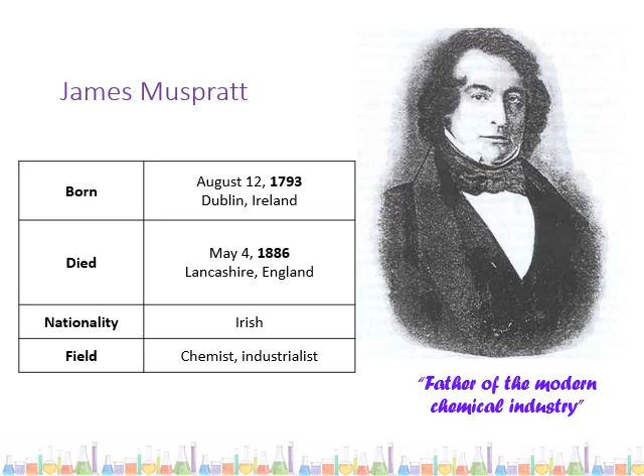James Muspratt is known as the father of the modern chemical industry. Again, you don't need to know anything about him. He's Irish, and I think that's why they mention him in the book. The principles of industrial chemistry. So that's what we're getting into now, and this is basically what the whole chapter is about: understanding how the chemical industry makes money by carrying out chemical processes, basically.

So there's just lots of definitions here. Again, not things that you necessarily need to learn off. Hopefully most of them will make sense, that the word will match up with the definition and it would be common sense. The first one isn't. Batch processing is a way of producing industrial substances. It's where the reactants, which we call feedstock in industry, are allowed to react for a fixed time with each other inside a vessel under controlled conditions, and when the reaction is complete, the product is isolated. So this is basically, you put all the reactants in the beginning and you take your product out at the end.

I'll do feedstock now. Just to point it out, feedstock is the reactant. There's no difference between a reactant and a feedstock. The only thing I would say is don't confuse feedstock with raw material. Raw material is what you use to produce the feedstock. You might have to treat raw material to make it pure to then use it as a reactant. So that's the difference between those two.

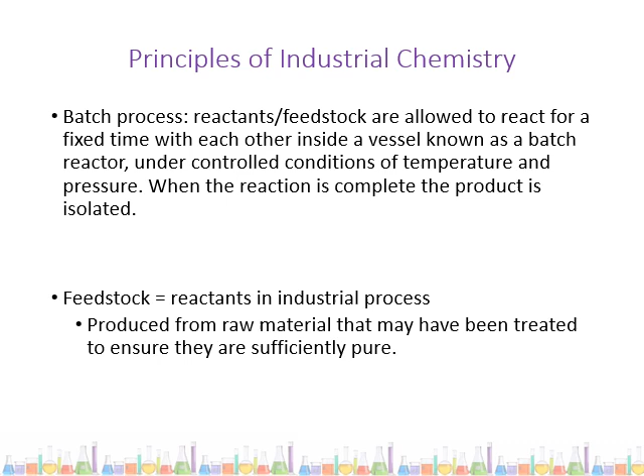So batch process, now we're going to go on to the other types of processes, which are the continuous processes. So batch process, you put your reactant in the beginning, you let the reaction happen, and you take your product out at the end. A continuous process is where you're constantly feeding reactant into the reaction vessel, and at the other end you're constantly taking product out as it's produced. So you're not waiting for all of the reactant to turn into product. You're taking out the bit of product that's made, so you're making space in the reaction vessel so you can feed in new reactant, and so it keeps going continuously the whole time.

Batch is like making a batch of cookies in baking, that you're mixing up your ingredients, putting them in the oven, and you get a batch of cookies out. Continuous is that you're constantly adding more reactant and taking the product out at the same time.

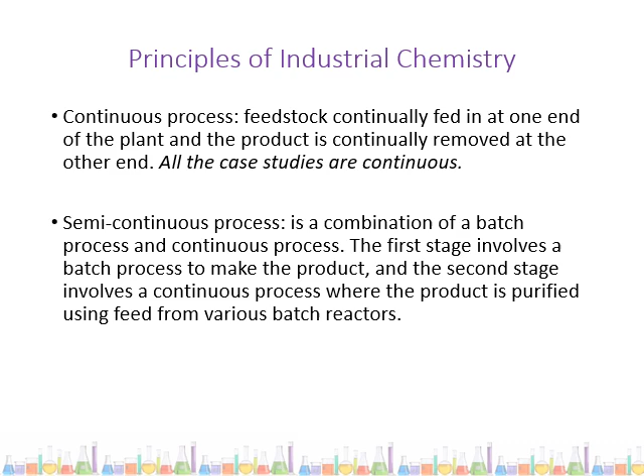A semi-continuous process is a mixture of both of them. Not as important, I haven't seen them ask about this, but it's basically the first stage is a batch process where you make the product, and then the second stage involves the continuous process where the product is purified using the feed from the batch reactor. So you have your batch process in the beginning, and then as you get your product from that, you feed your product in, effectively becoming the new reactant in the next vessel, and you have a continuous process of purification there.

The continuous process then, the advantages and disadvantages of that. So your first advantage is that it has low labor costs because it's all computer automated, but that does mean that you have the disadvantage of having higher capital costs, so higher costs in the beginning to buy all of this computer equipment and to set up the plant to be automated. Second advantage is that there's low risk of contamination because you're only making one product continuously.

But the flip side of that, the disadvantage, is that there's less flexibility as the plant is tailor-made for one specific reaction to occur. The third advantage is that you can have long periods of the machinery being in use without needing to stop for maintenance. But that does mean that it's not as cost effective unless it's run at full capacity all the time. It's very expensive to have it just sitting there not doing what it's supposed to do. So you do need to know the advantages and disadvantages of batch and continuous, and you need to be able to compare them. The one we're going to look at is continuous, so I would say that that one's slightly more important.

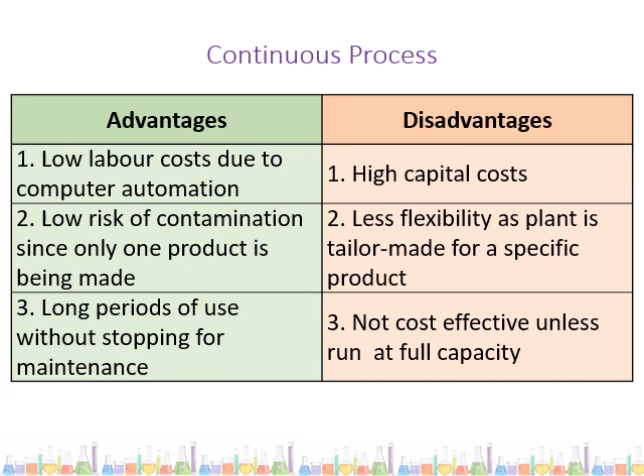Okay, so the characteristics, these are your list of definitions that you need to know. The first one that I've done here, raw materials, that's not a characteristic, but I wanted to put it in just so you'd have the definition. So again, raw materials are used to produce the feedstock, and our feedstock on page 79 of your workbook, if you want to read along there, your feedstock is the first important characteristic. So the feedstock is the material used in the process to make the industrial product. It's the reactant.

The second characteristic is rate. We want the best conditions of temperature, pressure, and the use of a catalyst to achieve the optimum rate and run the plant economically. We saw this in the equilibrium chapter, that you can't always have the exact temperature you want and the exact pressure you want. A lot of the time that's due to cost. And the compromises that we make on rate usually involve a compromise with product yield.

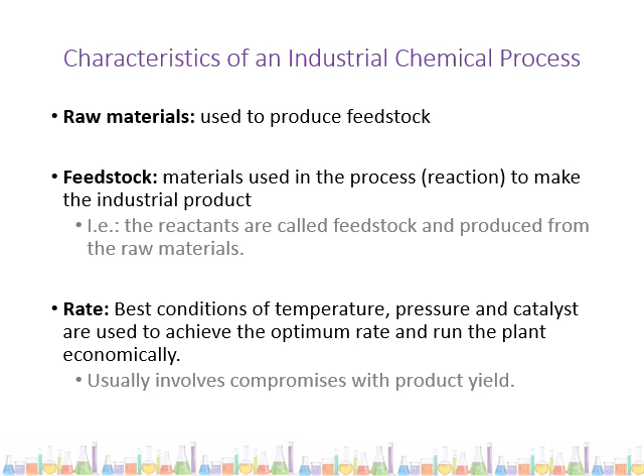And that's our next definition. Product yield: the conditions must ensure a reasonable yield in a reasonable time at a reasonable cost. And so in order to produce the amount that is economically beneficial, you do need to compromise with optimum rate. You need to find the balance there of how can you afford to heat substances up to a really high temperature or have them at a really high pressure, and also get out enough product that you're going to make enough money to be profiting rather than working at a loss.

Your co-products, hopefully this is one of those ones that you will be able to come up with a definition on your own just from common sense. Co-products are products made along with the main product. So they're not unexpected because we will see them in the balanced equation for the reaction. So it's not that they're things that we didn't want to happen. They're just being produced alongside our main product. We know they're going to be there. We're expecting it.

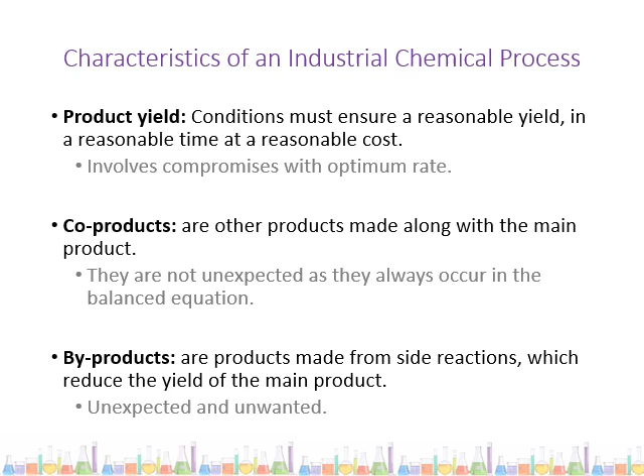The flip side of that is byproducts. These are products made from a side reaction that is unexpected or unwanted. We didn't want that reaction to happen. And that, of course, then is going to reduce the yield of the main product. If there's a side reaction happening that we didn't want to happen, that's obviously happening because it's using up reactant.

The next characteristic is waste disposal and effluent control. So the product must be separated from the co-products and byproducts. And so our co-products and byproducts are usually the waste. Depending on the material that is being produced, the co-product and the byproduct may be harmful to the environment or they may be toxic. And that would mean that they would need to be treated before they're disposed of, because we can't dispose anything into the environment that will harm it or the people around. And so this may add cost to our production.

Some co-products and byproducts, however, might be useful and they can be sold on for profit as well. So co-products and byproducts are not always a bad thing, but it's not the main product that we're looking for.

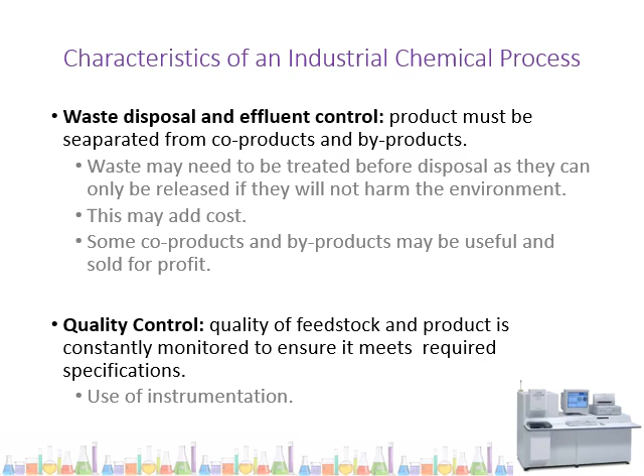Quality control, so obviously the quality of any chemicals being produced is extremely important, and that goes back as far as the reactants that you use. So the quality of your feedstock, remember feedstock is just another word for reactants, is very important, and the quality of what you're producing is very important. So they are constantly going to be monitored to ensure that the product meets the required specifications, that it's pure enough, and that there are no other products mixed in with it. For that, you're going to have to use instrumentation, usually a type of chromatography called gas chromatography, and infrared spectroscopy. And that's just a machine down in the corner there that you might see.

So the next characteristic is safety. And obviously safety in the chemical industry is really important, because if you have a small accident, that can have huge consequences. So the priority there is to have all aspects of health and safety covered by legislation. And how they do that is they have ongoing health and safety training for staff, and you will always have personal protective equipment. There will be helmets, boots, goggles, earplugs, and protective clothing.

The next characteristic is cost. So we have two types of cost. We have fixed cost first, and these are costs that must be paid regardless of the rate of production of the plant. So regardless of how the plant is doing, how much product you're producing, how much waste you have to get rid of, anything like that, the fixed costs are the things you have to pay regardless. That would be labor. You have to pay the people that are working. Plant depreciation, so that means that you need to upkeep the plant, you need to keep the plant in good working order. You need to repay any loans, anything along those lines.

Those are fixed costs, things that have to be paid regardless of how much money your business is making or losing. Variable costs depend directly on the rate of production of the plant, of how well the plant is doing. So those are things like the costs of raw material, because if you're buying more raw material, you might be buying it in bulk, so you might get a better price for it. So that cost can change. It can also change depending on the market.

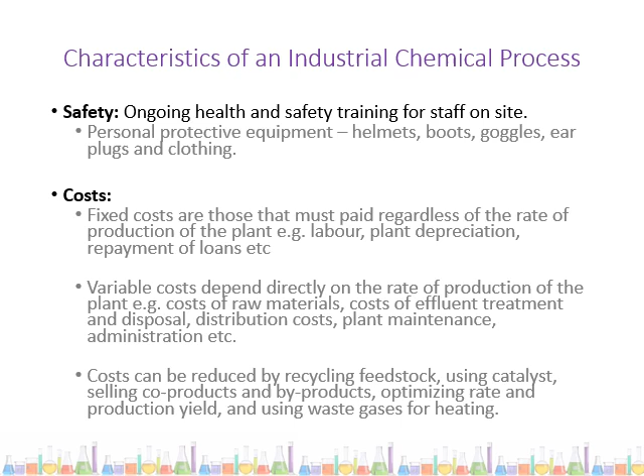You can sell co-products and byproducts to make a profit. We mentioned that a while ago. By optimizing your rate, so instead of having the highest temperature, that's the best temperature for a reaction, you might lower the temperature. Oh, sorry, I went forward too quickly there. We're just talking there about optimizing all the aspects of the running of your plant to reduce cost.

The next characteristic is site location. So you want to make sure that when you're building your plant, it's on good networks for transport, whether that's by road, rail, or by sea. For international transport, usually you'll find these plants by a big waterway, and that's so that they have a large supply of water that they can take into the plant to cool things down. You need to be near a skilled workforce, so they're not going to be in the middle of the Sahara Desert. There should be scope for expansion, so that they have a big enough site that they can build on to the plant if needed in the future.

You want to be in a country or a particular area in a country that has availability of the raw materials, so that you can purify them to get your feedstock. Obviously, you don't want to have huge costs. If your raw materials are located in China, there's no point in building a plant in Galway, is there? You'll have huge cost getting the material to Galway. And they need to be somewhere where there's facilities for disposal of their waste.

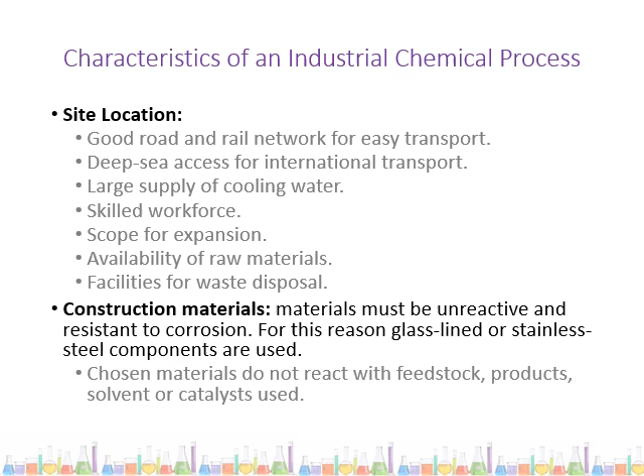So the next part of this chapter is the case study. There's 3 case studies in the book. We're going to do the first one. You only have to do one. And the reason I've picked this one is because we've seen it briefly in the equilibrium chapter already. It's the manufacture of ammonia, which I spelled completely wrong there in the title. I'll fix that. And urea. So it's the manufacture of ammonia and urea, and that's done by the company IFI down in Cobh.

The uses of ammonia that you need to know: it's used to make fertilizers, nitric acid and nylon, and it's also used as a lab chemical. How it's made: nitrogen and hydrogen gases are reacted together by passing them over a catalyst, and you do need to know that the catalyst used is iron. So the 2 gases are going to be put into a vessel. There's going to be iron catalysts there to help the reaction occur to get your ammonia out.

This flow chart here, which you can find on page 80 of your book, summarizes the main stages. So you have nitrogen from air. We're going to be going on to how to get nitrogen from air in the next chapter. It's fractional distillation again, but instead of for fuel, it's for air. And hydrogen can be gotten from natural gas.

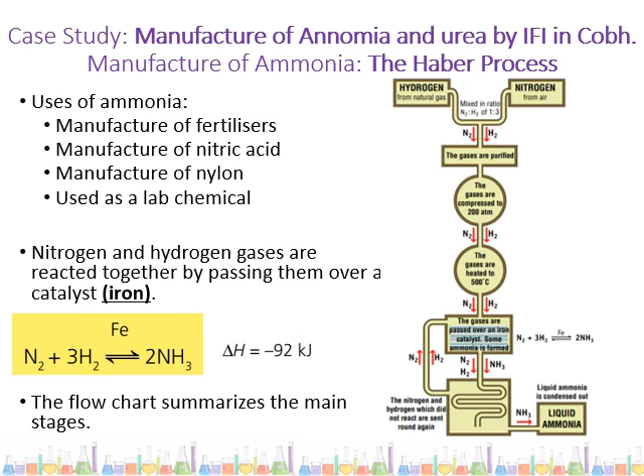The manufacture of ammonia and urea. So onto the second part, the synthesis of urea. The importance of urea is that it's an excellent fertilizer because it has over 46% nitrogen in composition. There's 2 steps in this. Ammonia is reacted with carbon dioxide and it forms an intermediate, ammonium carbamate. I haven't misspelled that, that's the name of it. And then this intermediate, the ammonium carbamate, loses water in a dehydration reaction to form urea.

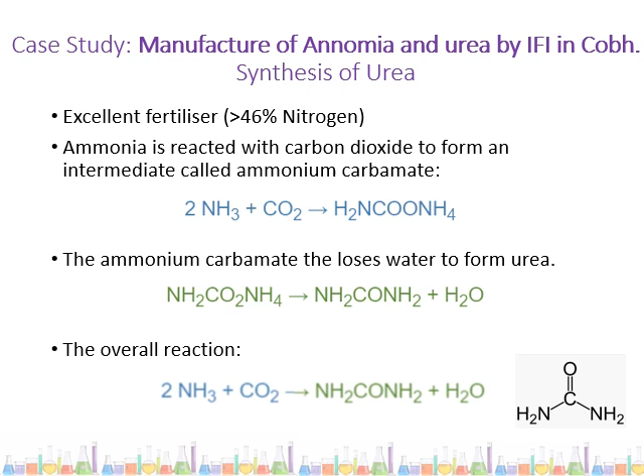For the overall reaction, you could just write 2NH3 plus CO2 to give you urea and water. That's your overall reaction. You don't need to know much more about the synthesis of urea other than the equations, to be honest. I haven't drawn it, I've just stuck in an image there of the structure of urea just for you to know what it looks like.

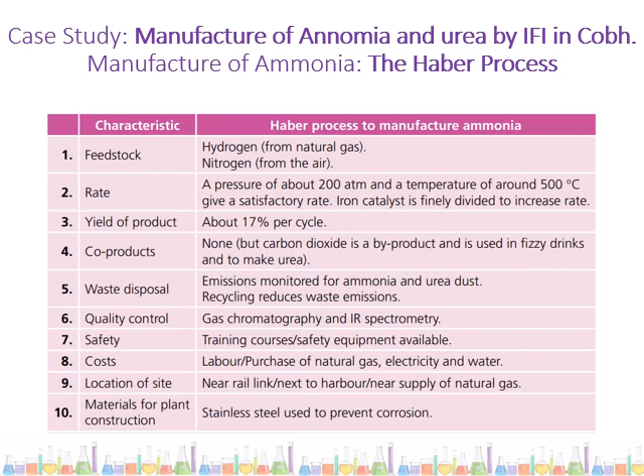So for the case study, the main thing you need to be able to do is apply these 10 characteristics that we talked about a while ago to the Haber process, the manufacture of ammonia, and to the synthesis of urea. So these 10 characteristics are summarized here for you. However, I really want you to go and read through pages 80 to 82 in your workbook, so that you understand these. Don't just use this as your notes, even though this is what you need. I want you to understand it and get back to me with any questions. We're going through it quite quickly and I'm putting the onus on you to go and do it yourselves. But do get back to me. That's why I'm here during the classes, so that I can help you out with anything you need.

So to take notes, you need notes on the contribution of chemistry to society. You need the processes batch, continuous and semi-continuous, and compare their advantages and disadvantages. The 10 characteristics of industrial chemical processes, those are very important. Those are your feedstock rate, product yield, etc. Then I want you to go over pages 80 to 82 on the manufacture of ammonia and urea, our case study. And the equations, you have to learn off these equations. They're there in the book as you read through pages 80 to 82 as well. So it's very important to include those in your notes. They're not in the summary on the last slide.

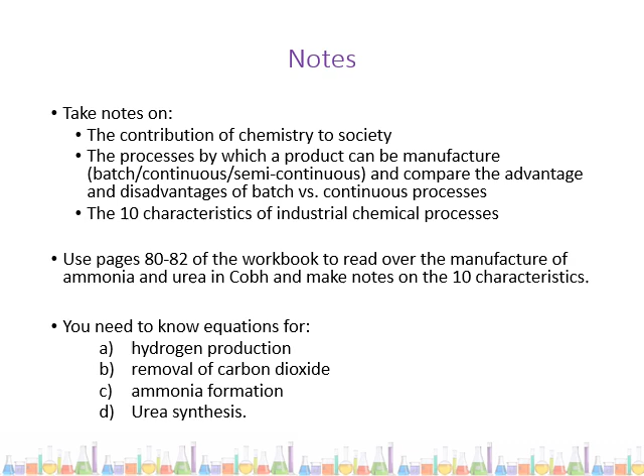And then the questions that you will have to do are outlined here. And that's the end of the chapter.